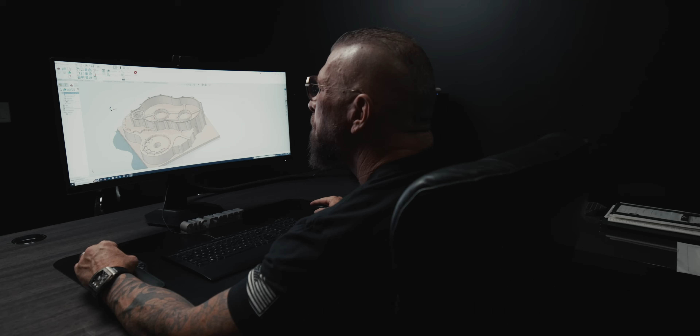When I saw that AI was now in the CAM market, I had mixed feelings about it. I was excited, but at the same time, I'm a programmer. When you look at our videos, when you look at the company, when you look at the education platform, when you look at all the work that we've done for SpaceX, Blue Origin, all these huge companies, I've only been able to create all of it because I started out as a programmer who solved problems. So programming is the core of who I am. And then of course, I've surrounded myself with a crazy team.

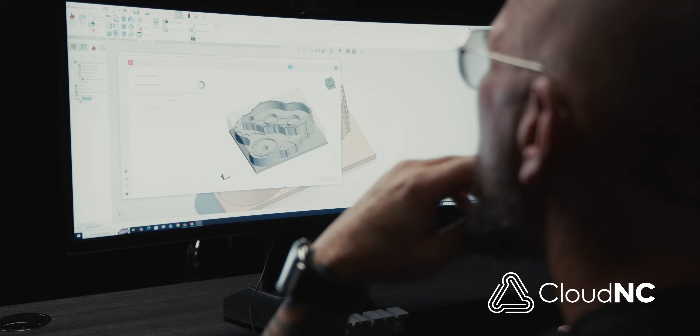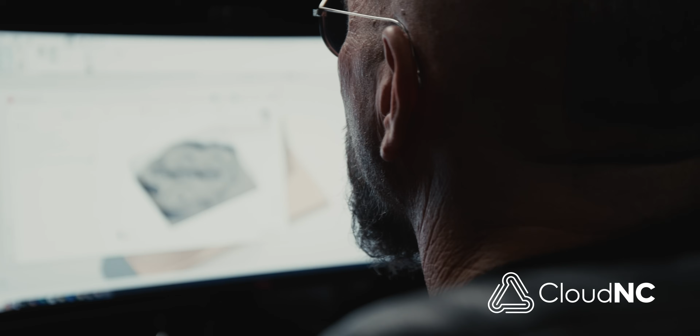Now let's break down a few things. When you look at CAM Assist and you look at AI, and you look at programming in general, when it comes to simple parts, you can actually program pretty quick once you have a lot of experience. As the part gets more complicated, when you have more pockets and features coming from all different directions and you're having to flip things over and click on a million different things, that's where CAM Assist is truly making a difference for companies. Now, granted, when you look at simple parts, and you're a good programmer, you can actually get it done in minutes. You can get it done quick and efficiently because you have the skills.

But not everyone has the skills that you have. And even if you have crazy skills, when you look at a part, all of a sudden it's not just a small little rectangle, it's a crazy housing with different pockets and levels and grooves and holes everywhere. And then you're machining on the outside, the inside, you're flipping it over. All of a sudden, a simple roughing pass like OptiRough or Adaptive is just not gonna work for you because now you need to look at all of it and there's a million features.

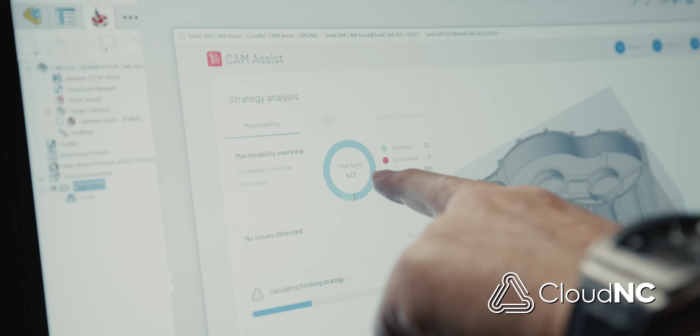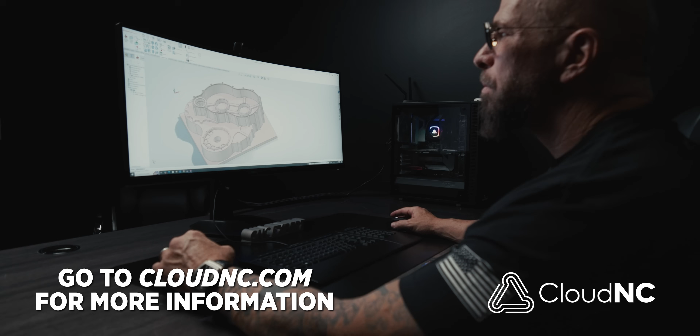So what CAM Assist is doing is basically taking all the boring aspects of programming out. If you're a master programmer, if you're a great programmer, or if you're even a mediocre programmer, you need to be thinking about strategy. You need to be thinking about optimizing your toolpaths. You don't need to be spending hours and hours clicking on every single pocket and chamfering every single little thing and clicking and clicking and clicking and clicking. Now that's where CAM Assist is thriving. It's taking away the boring, tedious clicking of toolpaths over and over and over.

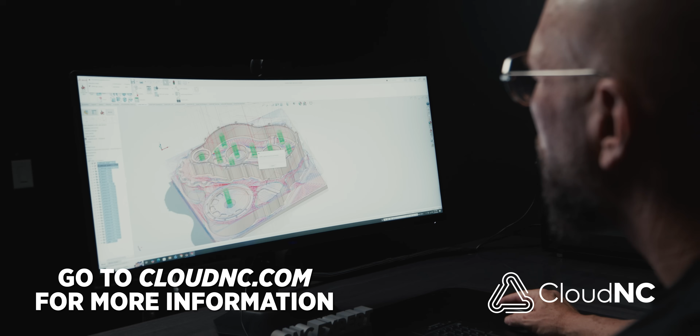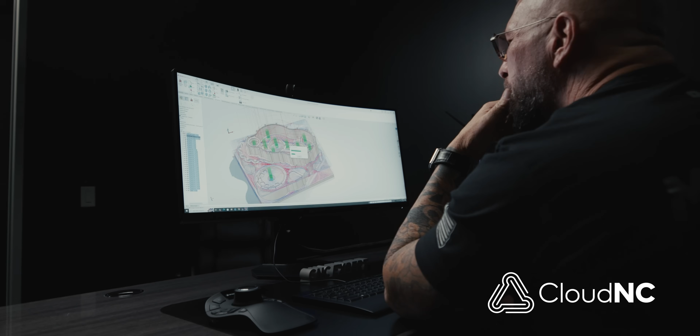In a few seconds, you can literally have your program. You can just establish where your zero is, click CAM Assist, it comes up, you just hit, are you doing 3-axis? How much power do you have? You just click a few things and you simply hit code. And no matter how big the part is, based on how you've managed your tool list and brought it in, it'll literally just program everything. And then you simply say, send it into your CAM software, and it just populates all the toolpaths. Now that in itself is crazy.

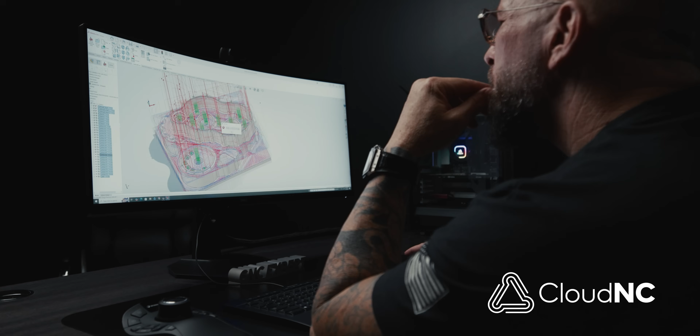Imagine if you have 50 different jobs. Just being able to do it that fast and looking at the time, your quoting alone is gonna make the whole package just work because it's gonna be so quick to just get toolpaths and look at how long it takes and have a good average for the machine. And then understand that, looking at all of these toolpaths, and looking at the tools, which I've selected, the step overs, the surface foot and the chip load, everything's basically running how I designed the tool list to be. I know I'm basically 80% there.

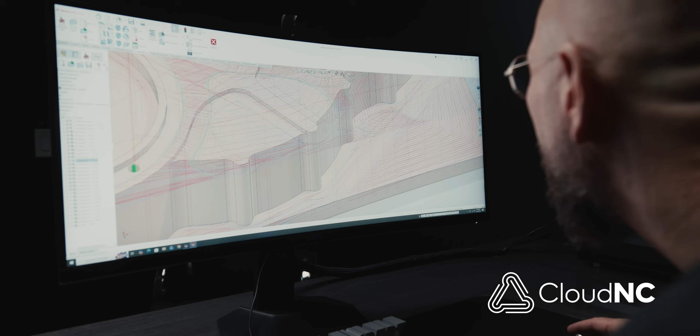So when I look at my time and it says 64 minutes, it's easy for me to just look at it and say, let's add a little bit of time, 70 minutes, let's put the setup in, let's do this. And boom, quotes, quotes, quotes. All of a sudden, now you're more efficient.

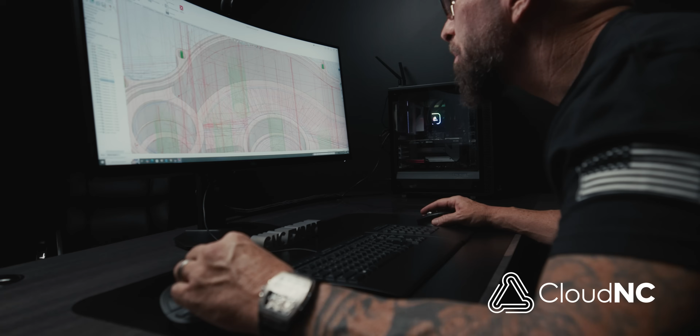I'm letting you guys know right now, behind the scenes, I'm watching CAM Assist as it grows, and it is so impressive. Every month it just gets better and better. It's allowing machinists to stay in control and dictate the behavior of the AI. So AI is just doing what you want it to do, but quick. This is about speed and intelligence, not about automation replacing a skill set. This is about being efficient, making more with less, and making money and profit in your company.

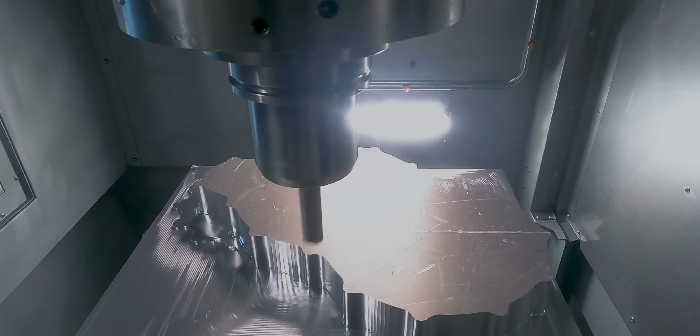Exciting things happening with CloudNC and CAM Assist. One of the biggest things right now, and something I actually had involvement in, is getting CAM Assist inside of SolidCam. Now I actually use CAM Assist in Mastercam, and you can use it on different platforms that you're on. But one of the cool things I saw with SolidCam is SolidCam actually lives in SolidWorks.

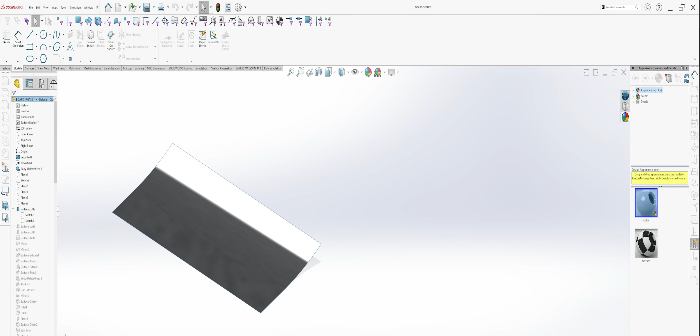So when you actually design a part, it's all about designing for manufacturing. You can literally take the part, be in there, and simply go to your toolpaths in SolidCam that's inside of SolidWorks. And now with CAM Assist being in SolidCam, being in SolidWorks, it's seamless. So you go from design to toolpaths, and now the toolpaths are crazy efficient.

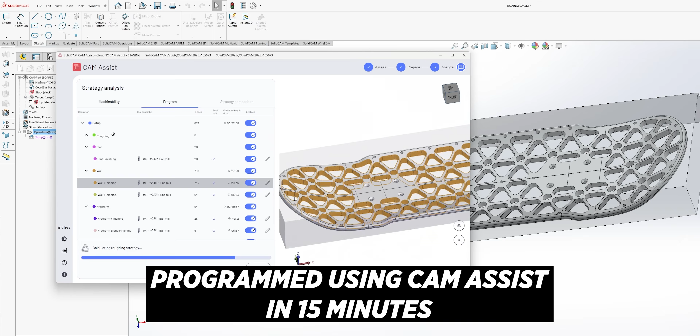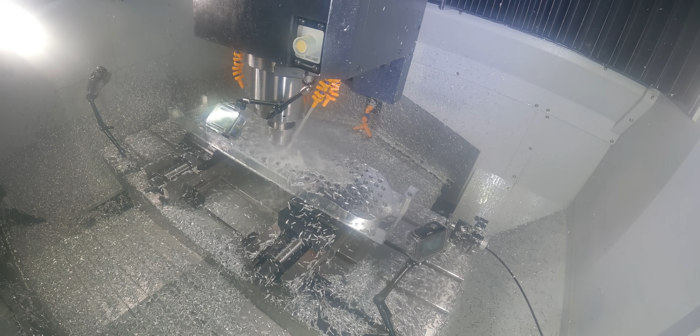So what used to take you 6 hours where you're designing and then going through and clicking and clicking and making everything happen, now you're designing and your toolpaths are like this, and you're making just some simple adjustments. Every single project, depending on how much time and complexity, you're just dropping the time and becoming way more efficient. So the seamless workflow right there is a thing of beauty.

Not only is CAM Assist making the toolpaths incredibly quick, but it's using iMachining and SolidCam to its full capability. So now you don't have to have a crazy amount of skill. That's what I've always said about iMachining. You can have mediocre programmers that haven't stepped into Inconel, haven't stepped into titanium, haven't stepped into different hard materials, because of the way SolidCam understands the material and the pressure and all of it.

At the beginning, you can simply set the tone by calling up the material that you're going to cut, and then all of the tools are running based on that material and based on the information that you put in the tool and in the library.

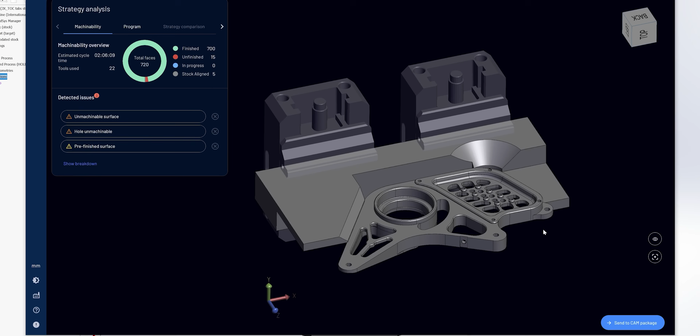Before we go further, I just want to let you guys know, CAM Assist is working in SolidCam right now, and it's live via the latest SolidCam service pack. If you're a SolidCam user, you simply access it right now by going to cloudnc.com to get started.

So I already talked about quoting and how it's so easy for somebody to actually put in the model, set the zero, get the toolpaths, look at how long it takes, and understand that you're actually pretty damn close when it comes to manufacturing speed and runtime.

Another thing that CAM Assist is super good for is DFM, design for manufacturing. So when you have a designer or engineer designing a part, they can come into CAM Assist, say hey, create toolpaths, and those toolpaths created can be off of a library that you have in your shop. Then they simply create the toolpaths, and CAM Assist will actually show you where there's issues. So if there's pockets it can't get to, if there's corners that are just literally impossible to manufacture, it'll point those out and say we can't cut those in this operation. You would have to do something else, or flip the part, or it's a round tool and you can't make a square edge. So it's huge when it comes to DFM, and it'll save you a crazy amount of time.

So now you're using CAM Assist to help you with your quotes, to do quick quotes and get back to customers super quick.

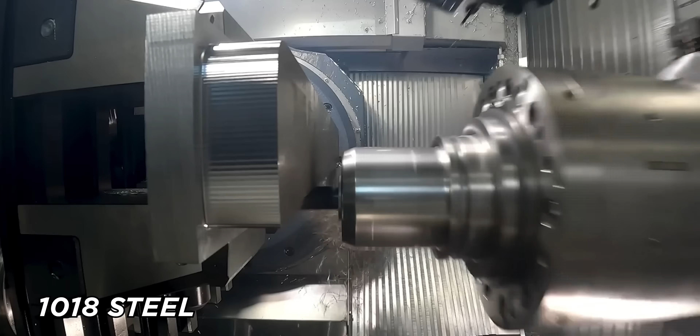You're using CAM Assist in engineering to actually help manufacture parts and make them more machinable, then going deeper into the manufacturing process and actually creating the code that goes in the machine to make you more profitable and get your run times down and just be more efficient. That actually becomes the natural next step.

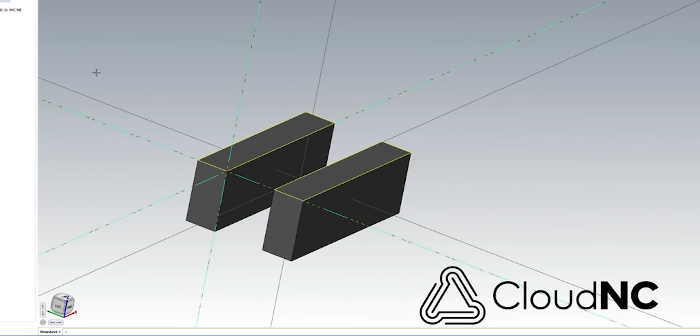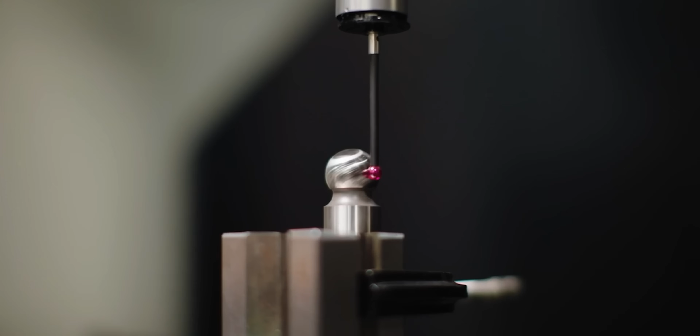Now, a lot of people say AI is killing jobs, and we don't like automation because it's taking the place of machinists. If you're scared about work leaving, work has already left. It's already been gone for 20 years, and we've been fighting over scraps in our different countries because of all the outsourcing.

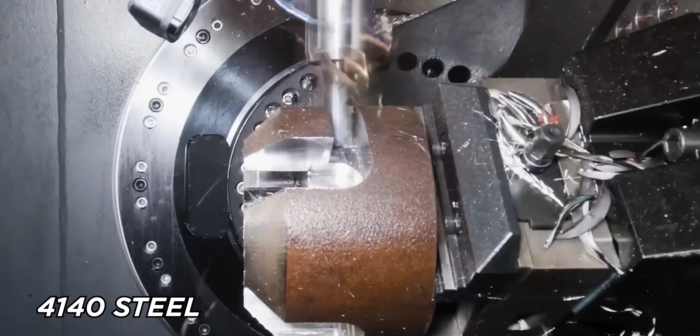So what I'm saying is we need a mindset shift. How do you actually get the work back to our country, the work that we actually want? You get more efficient, you bring in automation, you bring in CAM Assist, you bring in smart tools that help you do more with less. Then it's not about getting rid of employees, it's about producing 10 times more of what you're able to do now with the same employees because you're more efficient. And now those same employees are being paid more because they're dealing with AI, automation, robotics, high-end manufacturing, and because the work is coming back, now we're profitable.

I see a lot of people saying I can't make money, and owners saying I can't make money, and yet they're stuck in the past. We need to adopt a new way of manufacturing, a new way of machining, go into the future, build our companies, take care of our employees, and just rise levels together.

Now, before I end this video, I just want to talk about a few more exciting things that are happening with CAM Assist. A strategy editor is coming, and this is super important.

I don't know everything about it, but as a machinist, I like using a face mill across the top rather than an end mill. And if I have a ton of pockets, I like coming in with a nice coolant-through drill and just drilling super quick, dropping down to the bottom and opening up holes instead of doing a helical all the way down. So as a machinist, strategy is very important to me, and being able to look at something, engage time and say, hey, we're gonna do it like this and then like that, and look at the difference in time, is super important.

So CAM Assist is giving you the strategy power to get things done the way you want them done. But of course, we're gonna look at all the different options and see what's most efficient and what will make us the most profit on that job. Now that's coming quick, really quick.